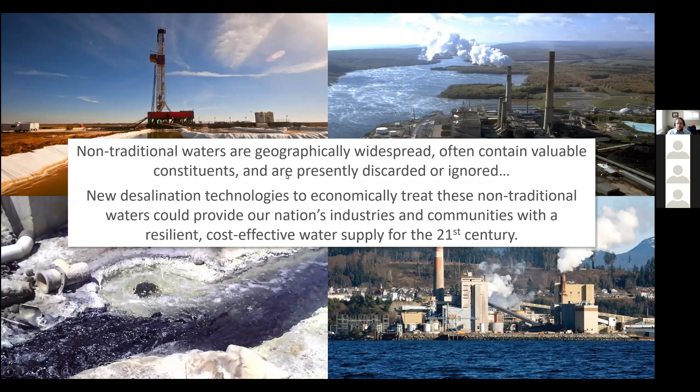So what is NAWI? It is a research hub made up of a lot of different partners across the country, made up of national labs, universities, and other private entities who join the consortium to either submit or participate in the research objectives or to have funding opportunities.

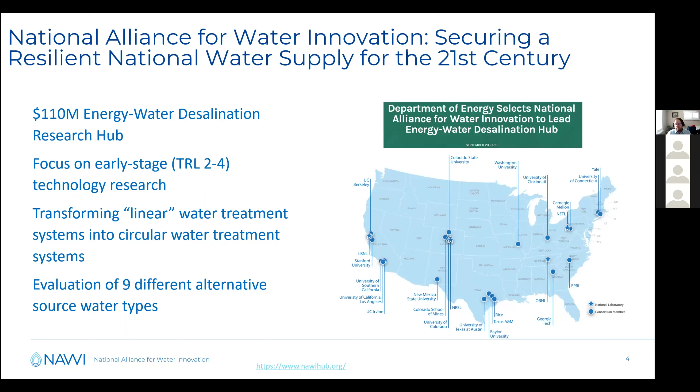It's a $110 million hub over 5 years, focused mainly on early stage research, so TRL 2 to 4. It's looking at transforming linear water treatment systems into circular water treatment systems, and to do that we are evaluating 9 different alternative source water types for 5 different end users that I'll go over in a bit.

So for this presentation, I'll chat about what are some of the climate impacts on the NAWI mission.

What we came up with was some indirect emissions of methane and nitrous oxide that occur during the biologic treatment process. Also, basically anytime contaminants are released into water resources, there is an impact on the environment.

Second, we see that there is the potential for using the brines of these water sources as a source of alkalinity and carbon sinks for carbon sequestration, particularly as we're seeing in California, where the looking for a water source to actually sequester this carbon is going to be a huge issue. If there's a way that we could treat water economically and then provide it, that would help for that objective.

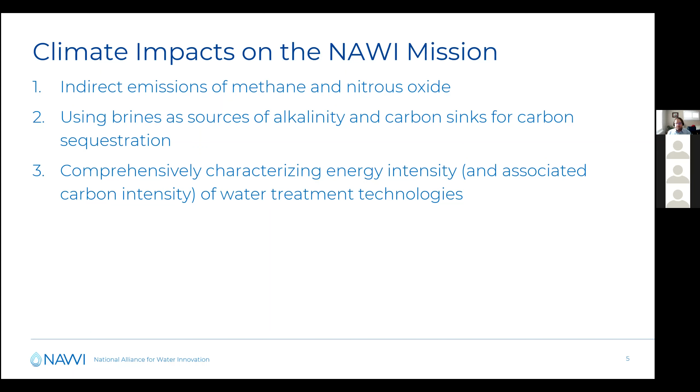We're also looking at comprehensively characterizing energy intensity and the associated carbon intensity of water treatment technologies - this is anywhere from electricity inputs, fossil fuel inputs, and chemical inputs. If we can establish that baseline, then we can have a mark on which to measure ourselves against and define those improvements.

We're also assessing the potential flexibility of water treatment systems to participate in demand response programs, particularly with a high share of renewables on the electric grid. There are going to be times where there are excess electrons, and times where there's a need for more electrons. If we can shift treatment or pumping or other loads, then we can actively participate, reducing our energy cost and providing some services to the grid.

So there's research on that, and the NAWI mission is really trying to develop technology that'll actually make this possible, not just to explore those opportunities. And then also, examining trade-offs of emissions of electrified processes, replacing chemical inputs.

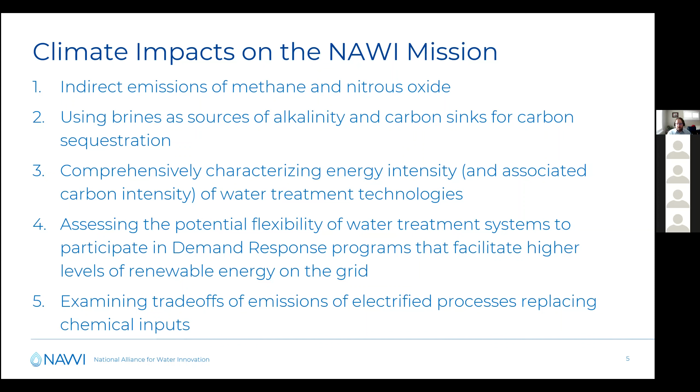So we can electrify the emissions, and take advantage of an increasingly renewable grid, and offset some of those fossil fuel costs in the chemical inputs.

So again, why does this matter for Race to Zero? We see, particularly in responding to drought and other water availability changes, an increased use of non-traditional water resources as a climate mitigation. This might be a little counterintuitive, because right now non-traditional water resources can often require 5 to 10 times more energy to actually treat. So we have this trade-off: we need water and we have excess electrons, or we can take advantage of declining costs of technologies and declining energy intensity to create some other resources.

An example of this is SB 1281 in California, which looked at reporting requirements to identify ways for oil and gas water reuse. This resource is generally just pumped down hole after it's used, considered a waste. Is there a way to identify opportunities for that? I'll go into some of the issues with that later on.

Really a balancing act between the current water system and the future. How does our current infrastructure and treatment respond to a changing grid? This also goes with reduced energy and chemical inputs from optimized treatment systems. And really the water system has a large role in these net zero carbon goals.

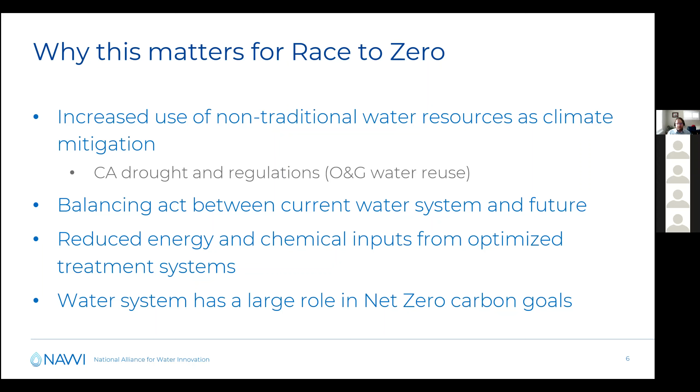Oftentimes electricity is a lion's share of both the expense at water treatment facilities, but then elsewhere, for these non-traditional water resources, they're often just geographically diverse. So how do we take advantage of all these resources in this area to benefit both the electric sector and the water sector? They play hand in hand there.

So what we've seen from some of our outreach is that users really expect water challenges to grow. They're not concerned that they can't operate, but it's the lack of a sufficient reliable water supply that can reduce some opportunities along the way. So it's not really a threat to them. It's more of a lost opportunity of, why am I pumping this water down hole when I could find some other use for it?

There are also water quality challenges, such as evolving contaminants like PFAS, microplastics, and selenium for certain water sources. Next is brine management, particularly from reverse osmosis and other current desalination, which is a major challenge. We're going to have to figure out how we're going to valorize these salts, or how we're going to reduce this brine, and particularly we've seen in the oil and gas sector induced seismicity issues and so on.

So this is really a big question of how do we close this salt cycle? And in particular, if we start desalinating a ton of water, we're going to have another waste stream that we'll have to deal with, or potentially a value stream.

Any of these solid technologies really need to work with existing infrastructure. We've put a lot of investment into our infrastructure and the water system, so how do we develop technologies that are new and innovative while still playing with our current systems? Institutional barriers can also slow the technology adoption process, both from a management perspective and from a regulation perspective. So how do we ensure that some of these technologies are actually safe to use and cost effective, and go down that path?

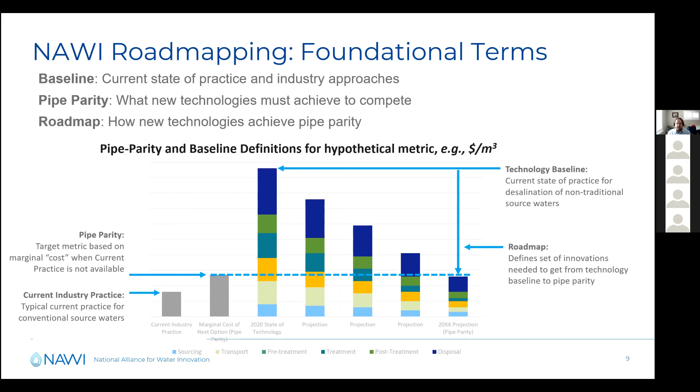So we're taking a look at where we are currently with the current industry approaches, and what new technologies must be developed to achieve and compete with that next water resource. Then the roadmap is really how do we actually get to where we want to be. A lot of R&D dollars are being put toward seeing if we can take a little step on sourcing, transport, pre-treatment, and treatment, and take a little chunk out of each of those to eventually get closer to cost-effective water treatment for these non-traditional resources.

So there are different pipe parity metrics we looked at: levelized cost of water, energy intensity, the use of alternative energy and water resources, taking a look at the renewable aspect and different sources, and also water intensity and system resiliency.

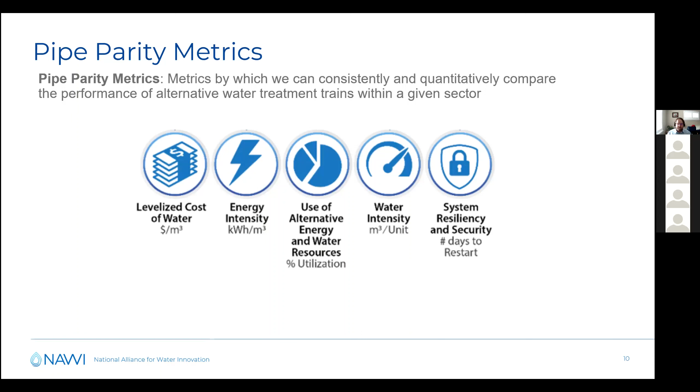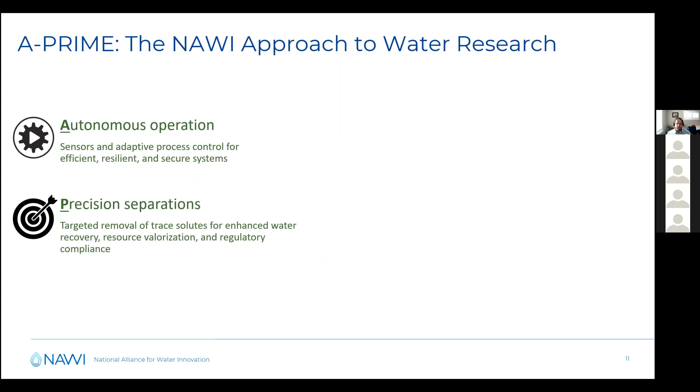So along this process, we're looking at some different areas. We're looking at autonomous operations - how do we develop sensors and process control? We're looking at precision separation - how do we actually target removal of these trace solutes for advanced water recovery, and how do we ensure that treatment aspect is there?

Resilient treatment and transport - basically, can these be off-grid systems? Can they be small? Can they be closer to their end users? Can they be closer to their source? And so on and so forth.

How do we reduce the brine, as I mentioned earlier, taking a look at these technologies that can displace thermal distillation and other materials research.

We have modular membrane systems - this is really on the manufacturing side. Can we mass manufacture these systems and then deploy them?

And then we have electrified treatment processes - this is really about can we electrify this?

And overarching this, there's actually a circular water economy. So how do we actually make sure that once we treat this water, there's a way to sell it and get it to its end users?

Along the way, particularly for these modular membrane systems, it's not itself targeting small scale, fit-for-purpose treatment. But along the way, there are a lot of opportunities for these technologies and improvements to then be incorporated in decentralized water treatment systems. So it's not really that we're looking to compete, but more like, how does the high tide raise all the boats?

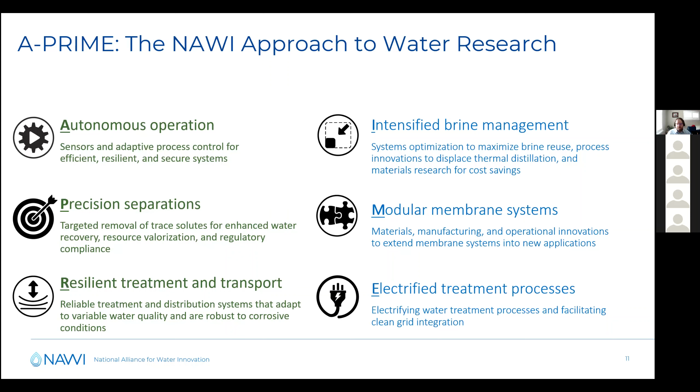As I mentioned earlier, we looked at 9 different source waters, and they came up with a catchy acronym, IBM Campus, which, as you can see here, someone had a sense of humor that day. So it's taken a look across industrial, brackish, municipal reuse - particularly how do we enable that - conventional and unconventional produced water from oil and gas operations, agricultural runoff, mining water, power and particularly thermoelectric cooling water, and also desalination for seawater, more traditional desalination technologies.

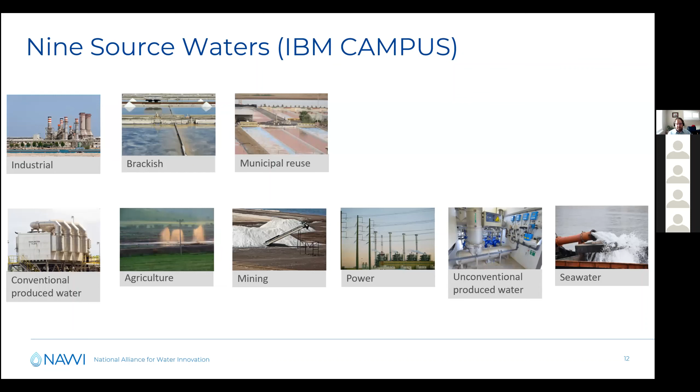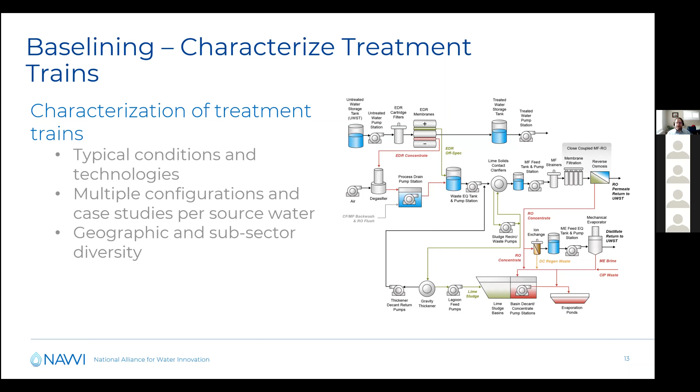So we have all these, and basically we have 9 baselines that we developed. Baselining, we start by characterizing a treatment train - on the right is a municipal water plant in operation - and we take a look at the typical conditions, technologies, multiple configurations of these different case studies per source water, and geographic and subsector diversity. So how do we get at least a snapshot of the current industry, knowing that's not going to represent every use case, but can we represent most of it and make an informed decision based off that.

Then after that, we end up using a techno-economic analysis tool we developed called Water-TAP3, which basically takes all this data, and we develop a baseline for those pipe parity metrics, and can break it down by process.

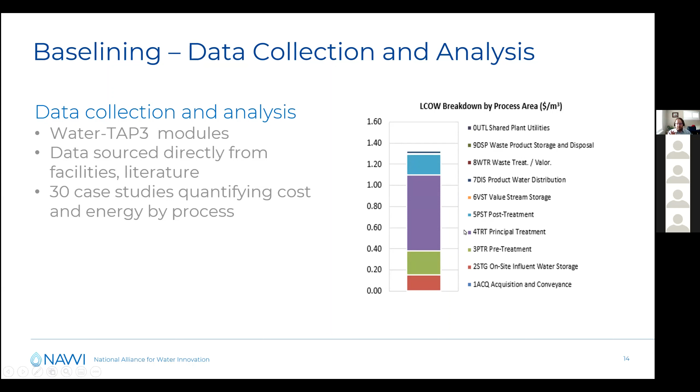So in this one on the right, the main cost of water is the principal treatment. It's basically trying to identify areas that we should target to reduce the cost. And then after that, we use those results and put that into our roadmaps and perform some sensitivities to look at if we make a change in certain areas, what impact is that.

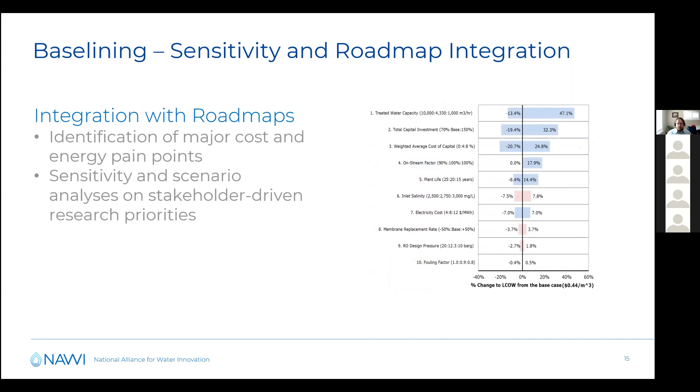That's another way to get more fine-tuned on where we wanted to focus for water treatment. This is then organized into 5 user roadmaps, and these are all available. So we have source water baseline studies that take a look at 9 different source waters, and kind of what is the current state and some of the research there.

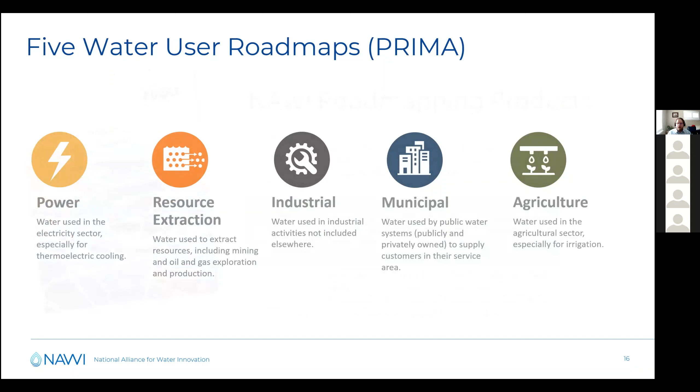Then we have 5 water user roadmaps, for each individual area from the previous slide: power, resource extraction, industrial, municipal, and agriculture, kind of what technologies are needed to allow for the reuse of those non-traditional water resources. After that, it's all summed up into one master roadmap that synthesizes all these outcomes across the 5 different water users and characterizes the different areas we need to focus on.

And so there's a lot of text amongst these 15 different areas. Depending on your interest, you can go and take a look at what actually interests you.

As I mentioned earlier, this is all available at nawihub.org. And again, we are always looking for partners to participate, so feel free to go on there and check out our resources.

So next, I'm just going to go over some high level findings. I'm not going to go over each and every single one of these, we would be here much longer than the 25 minutes that I have. But basically, across these 7 different areas, we came up with roughly 18 different things to focus on.

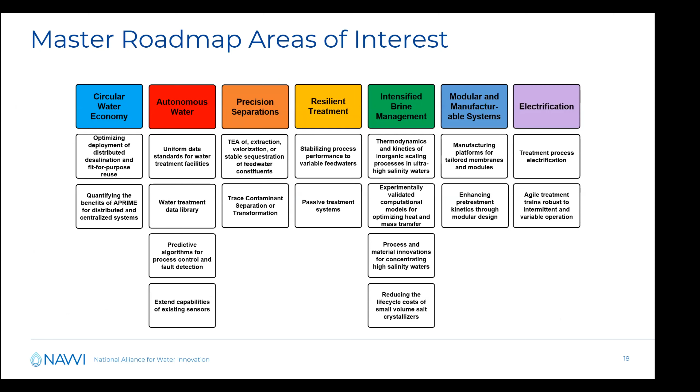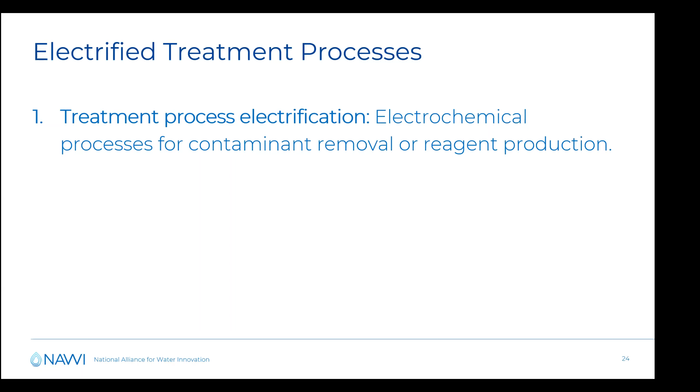As an example, I'll go over 2 of them. For the electrified treatment process, they want to take a look at treatment process electrification. It's pretty self-explanatory, but is there an electrochemical process for contaminant removal or reagent production, basically to try to remove some of those chemical inputs and also allow the water industry to take advantage of the changing and renewable grid.

We also want agile treatment trains for intermittent and variable operation. So is there a way that we can support load following and demand response services through these materials? We'd end up taking a look at, if you run a reverse osmosis system with an ever-changing electric input, is that going to cause impact over the life of the system? Is that going to cause some treatment train inefficiencies? We're basically trying to define the window in which we can play with.

There's really a lot of questions for this, a lot of concerns, but it's basically trying to take a look at that and to enable it.

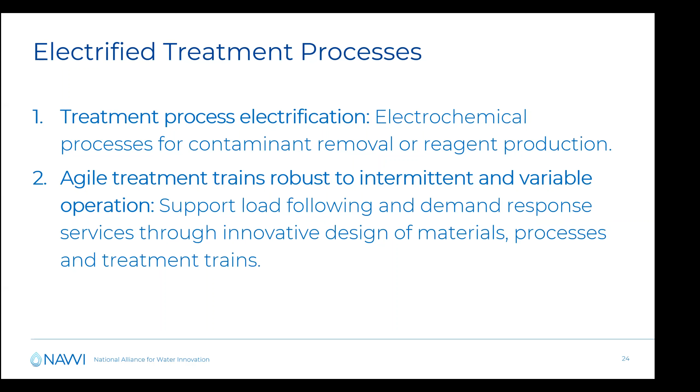And then next we have the circular water economy, and this is really about how do we get water from where it currently exists in its non-traditional waste form, and how do we transport that, or how do we treat that into a different end use. So this is really at what scale and where should these different treatment technologies actually be deployed.

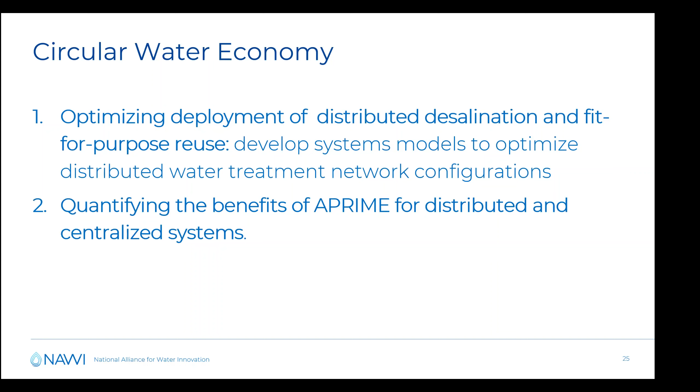So one of my initial prompts was to talk about some regulatory issues across roadmaps, or just kind of for the National Alliance for Water Innovation in general.

Some regulatory issues we're seeing are overall a public health issue. How do we ensure that these new treatment technologies can treat the water to the correct purpose, and how do we also communicate that? I think we've seen that with oil and gas water reuse, particularly on crops. There was a big public backlash against that—has enough science gone into this? Can we ensure the public that what they're going to use is actually safe?

We also have environmental health, which is much more about reducing emissions, and also just a changing environmental health guideline, particularly around PFAS or these emerging contaminants.

And then also water rights. Particularly in certain states, we've seen that as you take this product that was a waste and now define it as a resource, there are issues with who actually owns that water. Some of my background is in oil and gas, and people own rights to the oil but they might not own the water rights, or they might not own the land rights. So there's a big issue about if you take this waste and make it a resource—who actually owns that water and who should actually be paid. There are certain things that need to be discussed to enable that.